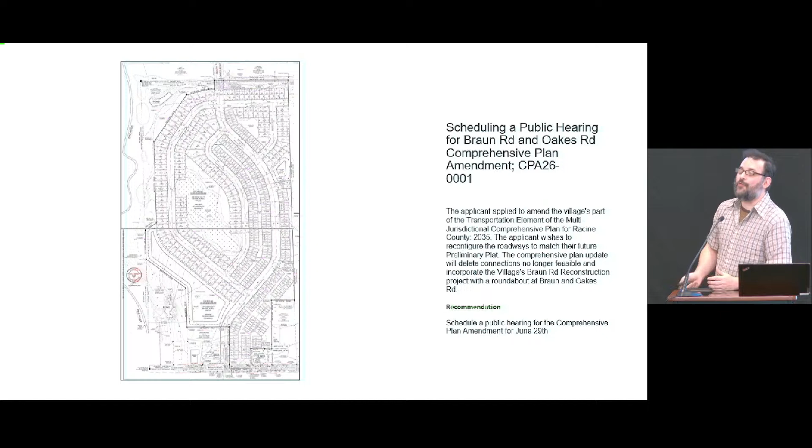Rom, for the Braun Road reconstruction, is it going to be budgeted this year? These are the plans, but the plan changed, so hold me responsible for that. So is it gonna be budgeted for next year?

My question is, how's it gonna impact the developer and their plans to go in and egress there? I had the same question, but I'll have to think about what the budget was for this year and next year. I don't remember that.

Joe, that clarification helps. As far as I've been aware, there are also talks of us constructing the extension of Oakes Road as well. So their development would not go in before Braun Road was reconstructed. They wouldn't start until after that was complete. Got it, okay, so we're gonna get Oakes Road and Braun Road complete for them to then build off of. Correct.

That's the purpose of this public hearing. And normally we would wait completely on the developer to get that through, but considering those are some of our plans, I felt it was necessary to at least get a public hearing scheduled.

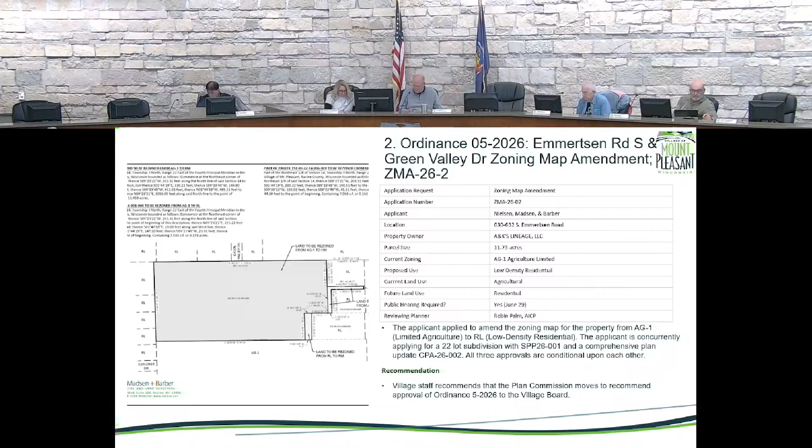Oh, and one quick note about the previous one: June 29th is not a normal village board hearing date. It's being postponed a week because of renovations to this room. We'll talk about that at the end of the meeting as far as our particular meeting and how to proceed for June, but that's just letting people know.

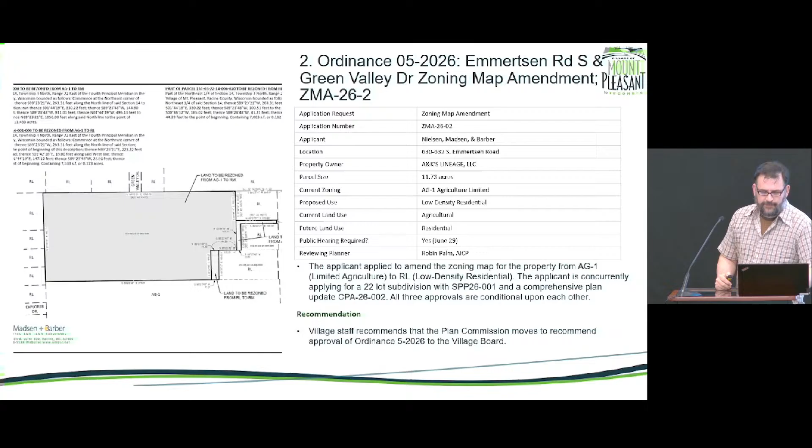Okay, so this is Emmertsen Road and Green Valley Drive zoning map amendment, ZMA 2602. It is for 11.73 acres. Oh, there it is. Sunny Slope is to the west and Emmertsen Road is to the east. Green Valley Drive dead ends to the northern part of this parcel. The rezone is from AG1 to low density residential, RL.

As I noted in the packet, the application indicated RM, but I assume that was just a typo, because RM does not come close to the subdivision plat they're applying for. We have the right to zone something down anyway, no matter what, but I figured it was just a mistake because that did not match the subdivision plat in character. It would not meet the minimum density in an RM district, so just clarifying that.

The applicant is concurrently applying for a 22 lot subdivision with SPP 26001 and a comprehensive plan update CPA 26002, which was on the agenda last month. The public hearing for that will be on June 29th as well, because we needed 30 days notice for that to get on the agenda. There is not a village board meeting at the end of this month, and then there will not be one at the middle of next month, so it goes to June 29th.

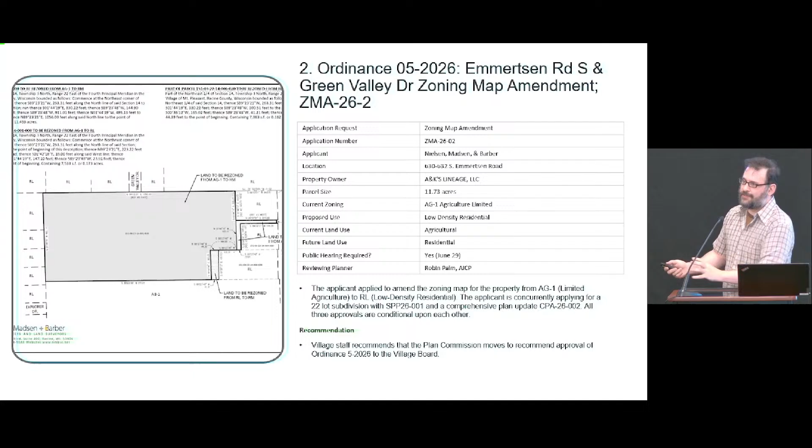So this is the rezone. The next item also is the preliminary plat related to this rezone. The item after that is the condominium plat that's adjacent to but not directly related to this application. So we can proceed how we want, considering them separately or together. The applicant is here, but I would say we could probably limit it to plat questions for the plat portion, and then rezoning overall questions separately.

It does meet the comprehensive plan for residential. This has had basically proposed roads planning on a subdivision extension through it for 30 years.

Quick question, the first two are the same parcel but have different acreage slightly, and I don't know if there's any reason for that. When I first looked at it, I thought, what's going on? I think I can explain that. They're giving away a small portion of the acreage to the condominium plat. That's the Hamilton one, later on. Yes, thank you, that is the discrepancy, and I didn't catch it on both of them.

That might answer Ram's question from earlier. I don't recall, are the outlots detention areas? Oh, the outlots, that's part of the plat. So this is just the rezone.

Yeah, they would be, I went ahead of myself. This is a zoning map amendment. Mr. Chairman, if we take this item for the agenda as rezone, then we go to the plat question, and if we have questions or comments on the plat. I guess what I'm trying to say is it makes more sense to have discussion on the plat question first and then come back to the rezoning, because rezoning is mostly yes. I don't have any questions, and I don't think there will be many questions on the rezoning, so any comment or question would be on the plats.

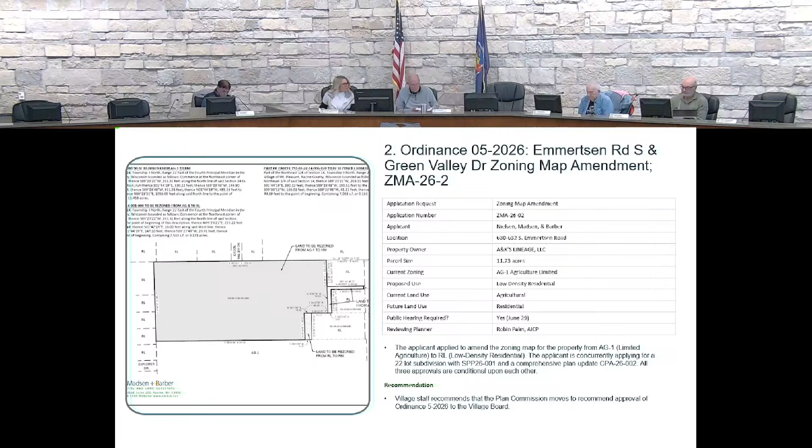I move that the Plan Commission recommend approval of ordinance 5-2026 to the Village Board, for the Emmertsen Road South and Green Valley Drive zoning map amendment, ZMA 26-2. I'll second. Okay, got a motion and a second. All in favor? Aye. Opposed? Passes, thank you.

All right, so now we're back to the plat again, right? Okay, perfect. So we've had a lot of questions, and if everybody's okay with that, why don't we have the developer come up and field some questions from us? All right, sounds good, thank you. It's about time, I'd love to get off the hot seat.

Mark Eberly, Nielsen Madsen Barber, 1458 Horizon Boulevard. So what can I answer for you? Well, you've heard some of the questions. Yes, so let's talk about construction access.

So this is a preliminary plat here. Typically we've got to design these things, we've got an entire final plat to bring before this board here. So we would like to not focus on construction access at this time. We do have 2 or 3 months of design where we can get this designed and come back with some solutions for access to this property that may or may not be through the development to the south. So I'm asking if we could potentially go that route.

Coming off of Emmertsen Road, that 18-foot wide strip is lined with fences and trees and all kinds of stuff. It's really not wide enough to provide access to the development. And the condominium property to the south that the developer owns also has brand-new driveways and that type of stuff on it, so those two are really not options.

You're saying to the south, you mean to the north? No, the condominium is in the southeast corner of this general area. Oh, the Hamilton. Yes, thank you. Correct, so again, that has new construction, new driveways, some other stuff, so those two are really not options. So we need to explore potentially a solution to the southwest here, but we do need time to do that.

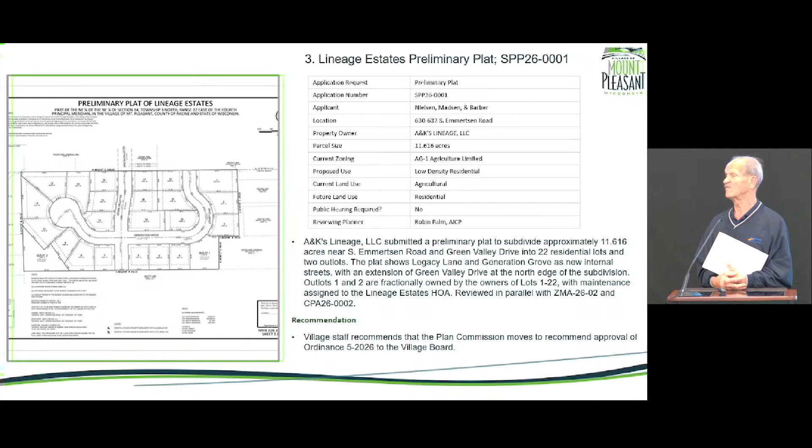Don't know about the neighbors there, they probably aren't gonna be real happy with that access either. So that one access point coming off of Green Valley is the best way to get in and out. But there are options that if we have to, that 18-foot wide one, we could use.

And I don't know your thoughts on that, Mark. No, that's fine. I just know there's trees and other clearing, other items that have to get cleared out of there to accommodate. Exactly, so it is an option. We will pursue all options.

Who owns the 18-foot section we're talking about? Mrs. Hamilton. Oh, she owns that 18-foot strip, huh? Correct. Okay, interesting.

I would only clarify that according to the DPW, access off Green Valley through the dead end is not permitted. That's full stop. So without an approval of a driveway or something else, you can't take down dead end signs and access the property through there.

I understand that, but upon approval of this plat, and assuming they're going forward, that fully becomes a dedication that's gonna come to the village, and that road is right of way. Access is, you can't deny it. Yeah, I mean, it's a cart before the horse situation.

I know. Oh, well this last one, I understand the garage thing, that's a whole different ballgame, but for this plat here, they have every right to use Green Valley to come in there. It's public, right? It's a public road. So our decision is to say, hey, we can't deny them to do that once we approve the plat. Yeah, once we approve it.

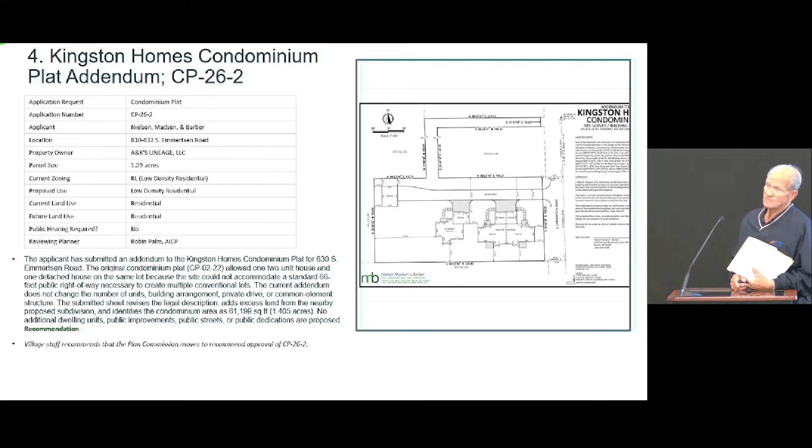Okay, and I guess my main question before we call the vote is to make sure that you, or the people who the plat is for, are amenable to this, and that there's not going to be an issue with what we've just done.

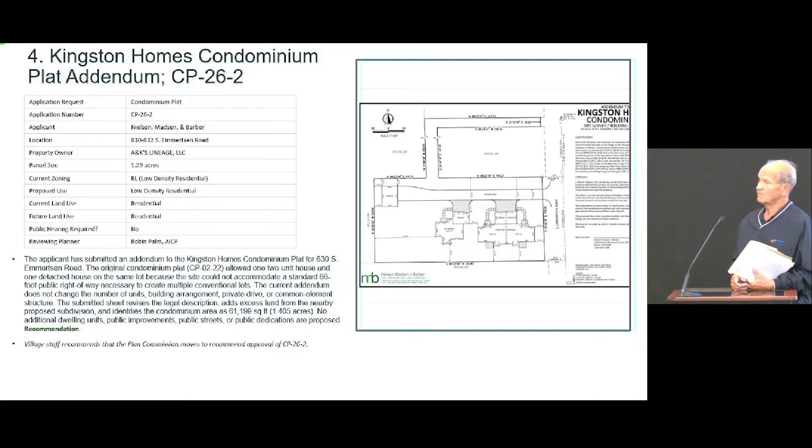Won't be an issue. I've already spoken to the owner, and Ms. Hamilton has agreed to that. Okay, very good, appreciate that. Thank you. Okay, now I'll call the vote.

All in favor? Aye. Opposed? Okay. Good, it passes, and we're moving on. Good luck.

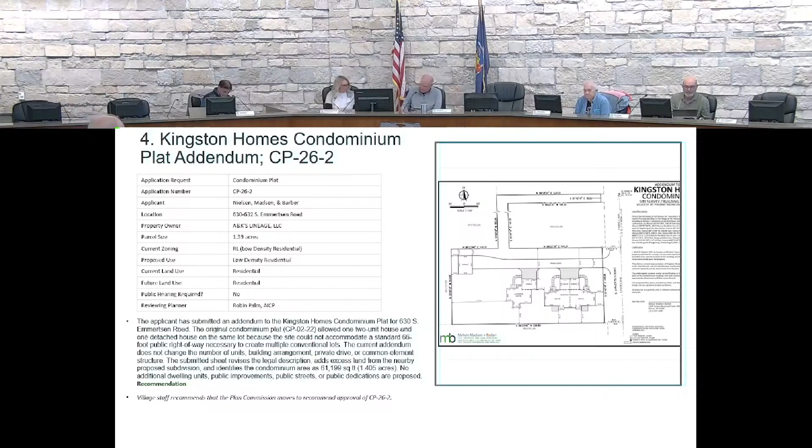This is TriCore Professional Park Office Condominium Plat Addendum, CP 2026-03, 6921 Mariner Drive. We hadn't had any condo plats, like maybe one in 5 years, and now we have two on one agenda. That's just how it rolls sometimes.

The applicant submitted an addendum to the plat of survey, an amendment and restatement of the declaration of the Prairie Professional Park Office Condominium, which will be renamed the TriCore Professional Park Office Condominium. The amendment brings the 1055 Prairie Drive parcel into the condominium as Unit 5, expanding from 4 buildings to 5, and updates the legal descriptions and easements to cover the expanded footprint. It also consolidates the original 1982 declaration and four prior amendments from 87, 92, 97, and 2021 into a single restated document that is recorded. The zoning is C3; none of the zoning or uses are changing—it's just ownership and consolidation.

And I believe there's a representative here. I guess the only question—anybody else have a question? I have one small one—was this Unit 5 just a standalone building? Yeah, it was a standalone, separate parcel.

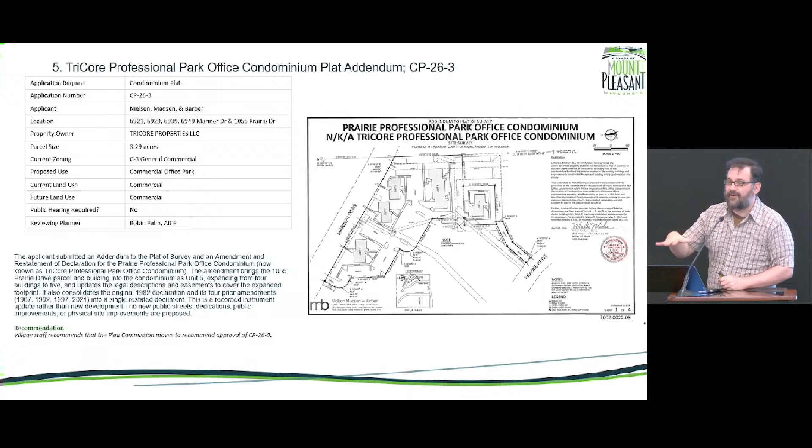Within the condominium development? No, it was outside of it, and now it's being absorbed. So the whole thing was not a business condominium project, and Unit 5 was all by itself the whole time? It was not Unit 5 beforehand—Units 1 to 4 existed, and now they're absorbing it. They're bringing it into the family.

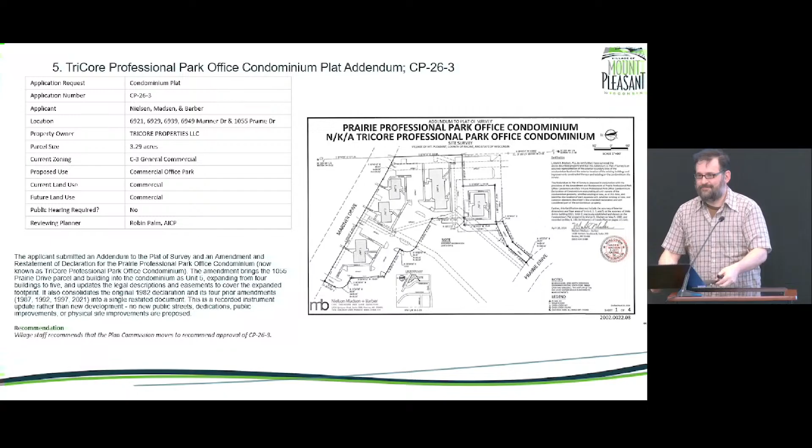Why don't you bring up the—come on up, sorry about that. Name and address for everybody, please.

TJ Orth, home address 3512 Fence Line, Caledonia. Office building is 6939 Mariner in this office park. The office park association has consisted of 4 buildings since the whole thing was built, but it was built with all 5 buildings. The owner of 1055 back then, due to a lender issue, didn't want them to be part of the association, so the association said that's fine if you want to stand alone. But these 5 buildings have been operated together the entire time. Now the owner of 1055 and all of us as board members of the office park want to finally get the building into the fold and be done with the nonsense that lender created way back then. It's always been operated as a 5-business office park—all the buildings are the same, built by the same builder. We're just trying to iron things out.

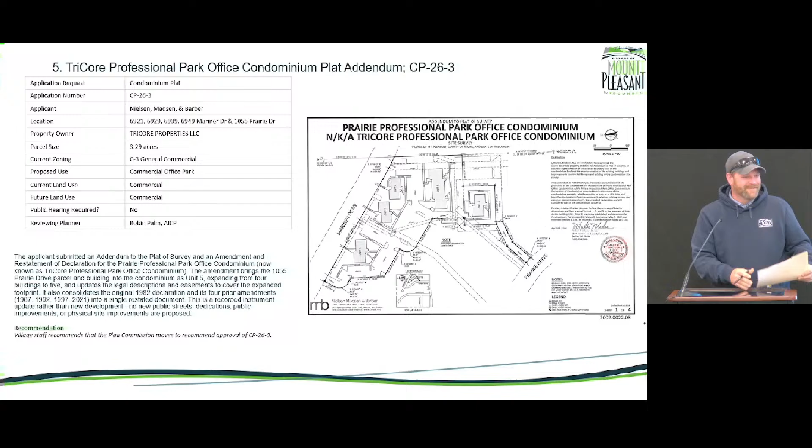Okay, makes more sense, thank you, appreciate that. That makes sense.

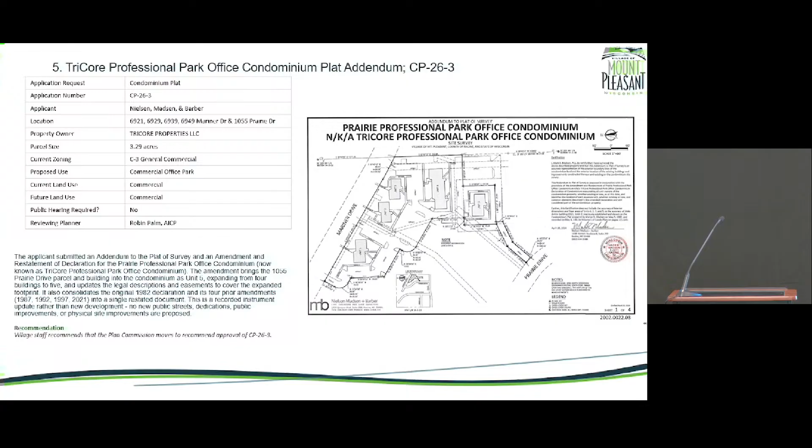All right, any other questions, anybody? I think it's a good idea. Looking for a motion? Motion to recommend that the Plan Commission moves to recommend approval of CP-26-3.

Second. Okay, got a motion and a second. Any other comments, questions? All in favor? Aye. Opposed? None. Passes.

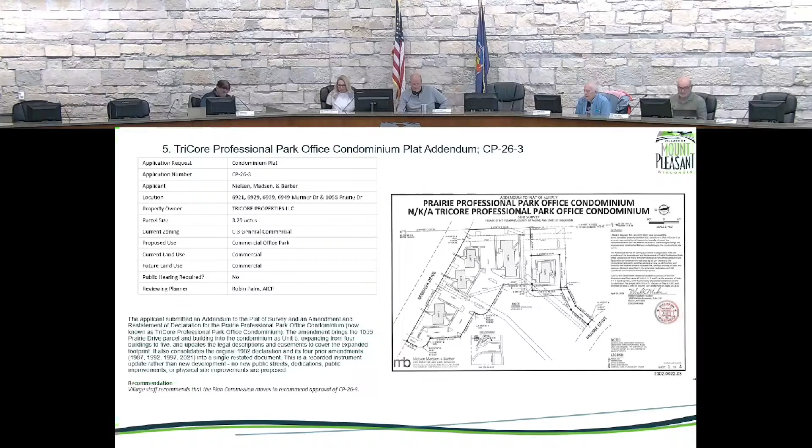Nice cleanup. Yeah, legal incorporation and property act, it's a lot of the same verbiage. Oh, okay. All right, I'll eat egg for that one, that's fine.

Okay, so next up is another plat. This is the Sanctuary at Pike River Plat, final plat, SFP 26-0001, Old Green Bay Road and Braun Road. This one is very familiar to all of you, and even more so because the final plat is almost exactly the same as the preliminary plat that was approved last year.

This is a 95-lot single-family subdivision located between Old Green Bay Road and Braun Road, adjacent to the Royal Oaks subdivision. The final plat substantially conforms to the preliminary plat approved as PSP 25-1 in August 2025, with minor changes, including the elimination of 1 lot, the half-acre lot on the west side, number 52, and 1 outlot, former outlot 2 on the south of the property.

Judging by what's on there, it seems like that outlot was dedicated to one of the property owners. It was a little sliver that had essentially been used as a driveway for those property owners for years, so I assume it was just dedicated over. They will be able to answer more to that. Outlot 1 retains the proposal of a public park and wetland area.

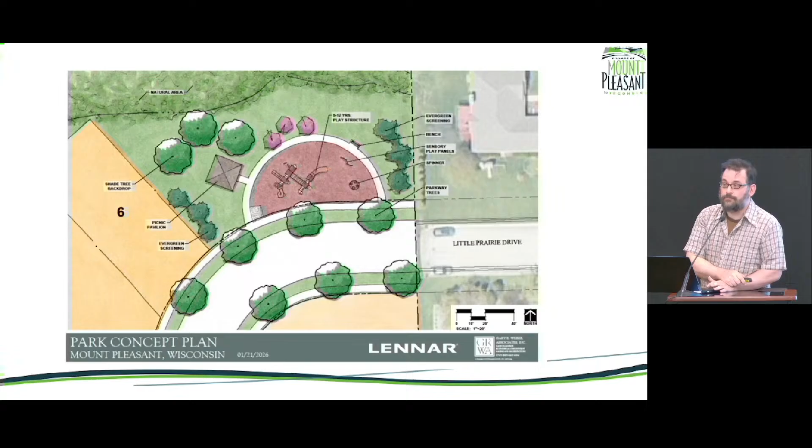The other suggestions were a walking path around the wetland area, as well as a potential entrance into James Turret Park. Those were the two main suggestions as far as actual improvements that would warrant acceptance, but this is nice too. They also submitted this as far as the monument signage, which would be approved separately. I believe there's a representative here if you have any questions.

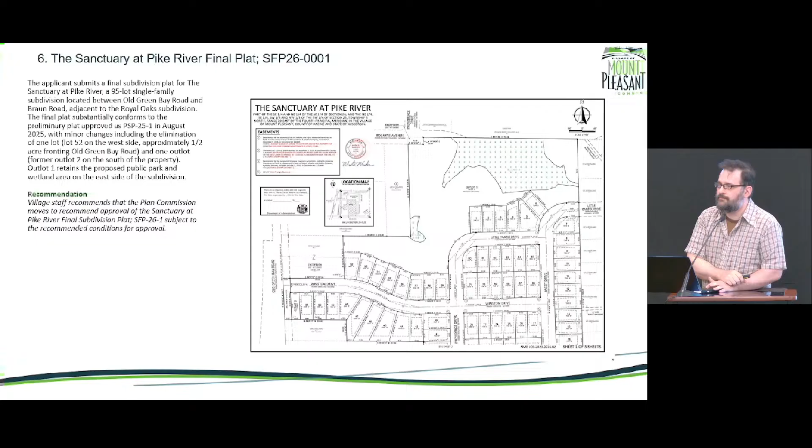The final plat that I have is so small that I'm assuming there are sidewalks on here, I just can't necessarily pick them out, but I'm assuming that's all in there. We either say that they have to be on the plat or on the road sections, which they are. Okay.

Some of the conditions were that this one had 15-foot vision triangles and it should be 20, and to kind of spell out street lighting and street trees. The street lighting, they do have lamp symbols where it has a little triangle, that's actually way better than a lot of plats, because we always put that one on. But we need either saying that they're going to adopt the We Energies special, or go with whatever design that they have to submit, and then indication of the street trees requirement.

Who reviews the light fixtures for appropriateness in the village? That would be between us and Public Works. So if it's in the right of way, then Public Works would be reviewing it as well. We Energies owns most of the light poles in the village, so that's usually the assumption. But some people dare to be different.

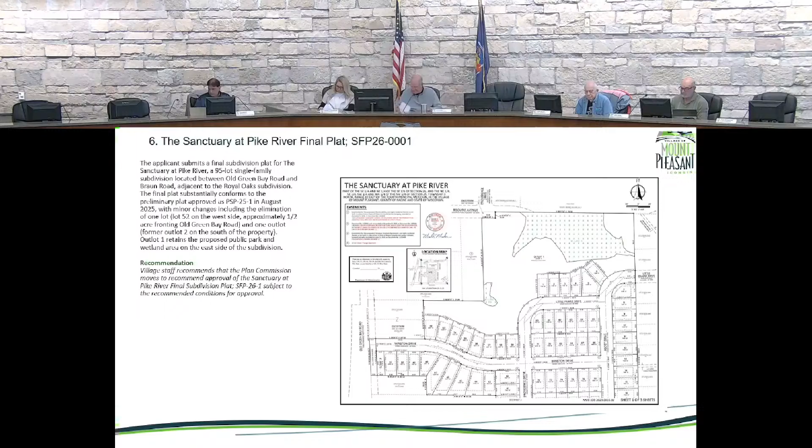All right, staff reports? None, I had enough to do this month. Thank you very much. I'm sure you did.

So we adjourn, but next meeting, June 17, 2026, question mark. The question mark is, I'm tracking a CSM right here for Enterprise Drive, as well as the number 6 addition to the Hoods Creek subdivision, as being planned for June.

Right now, maybe our tech folks can speak to the nature of the renovations here, but apparently audio and video recording will not be available. So if you guys are comfortable meeting and going old school, I have a feeling you all are comfortable old school, but it can still be June 17th.

I'm good on the 17th. 17th is fine. Are you talking about one of the other rooms here? No, it would be this room, and Community Room 1 would be like there would be no audio or video. I don't know the extent of the renovations, but they said we could do it old school.